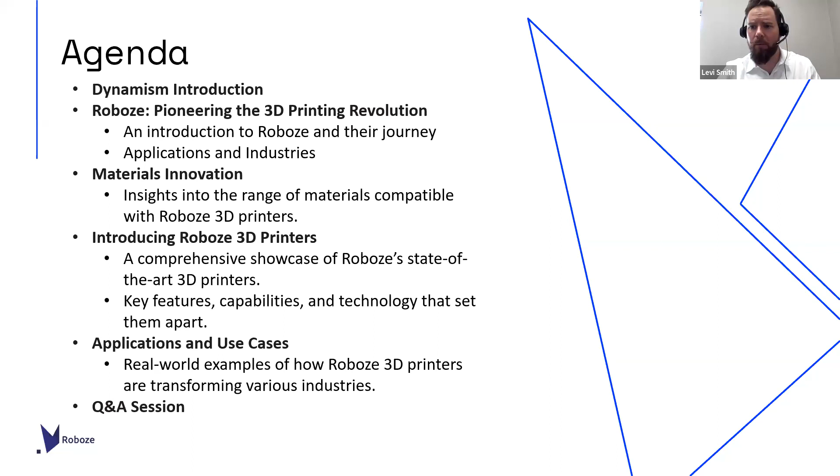So definitely drop in questions as they pop up. I know my questions, they come in and then they go, so feel free to drop them in, we'll get them answered as we go. And at the end, we'll also dive into a Q&A. So that's kind of the agenda today. I'm going to pass it right back over to Hirash to talk a little bit about Dynamism.

Thanks Levi. Dynamism established in '97, headquartered in Chicago. We have a couple of showrooms across the country as well. And I'd like to mention that we are doing a grand opening and expanding our showroom in Chicago starting the beginning of the year. So I would like to welcome everyone to our grand opening. If you have a chance, please stop by. There's going to be a lot of exciting printers and toys that we can play with. Stay tuned for the emails to come around with more information on those dates.

But with Dynamism, we provide the leading edge technologies to our clients. We try to stay ahead of the curve, try to be innovative, bring the most exciting materials and technologies over to our clientele. We have experienced and dedicated professionals, everything from service, application, sales, that can address all the needs of our clients and give unbiased expert advice to what technology and what materials work, always looking into the future for the new exciting stuff.

And this is why we partnered up with Roboze, because we think that it offers extreme value to some of the materials that they're able to print with. We work with different education institutions, national laboratories, Fortune 500 companies, all across the board, even mom and pop. We've installed printers in garages and also major labs. So we're able to adapt to all of our customers' needs and bring in the best experience possible.

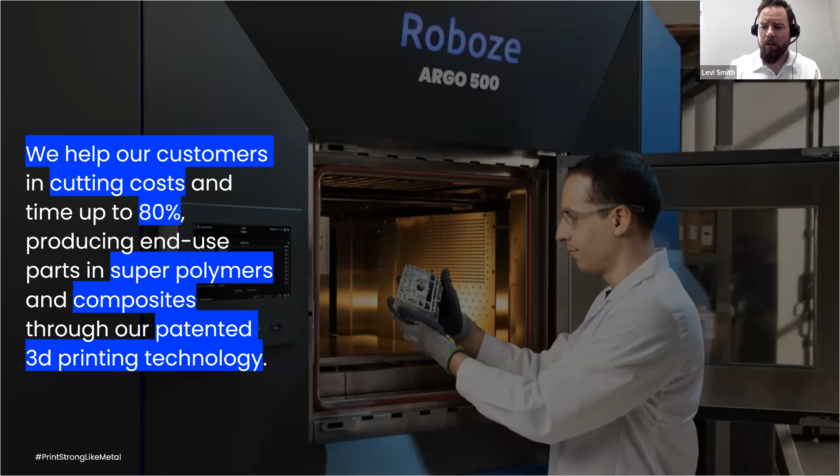If we look at our footprint, our global headquarters is out of Bari, Italy, in Southern Italy. I'm at our North American HQ here in Houston, Texas. We've been around for roughly 8 years now, and we have over 500 printers installed. You can get a rough feel for our footprint in the world there.

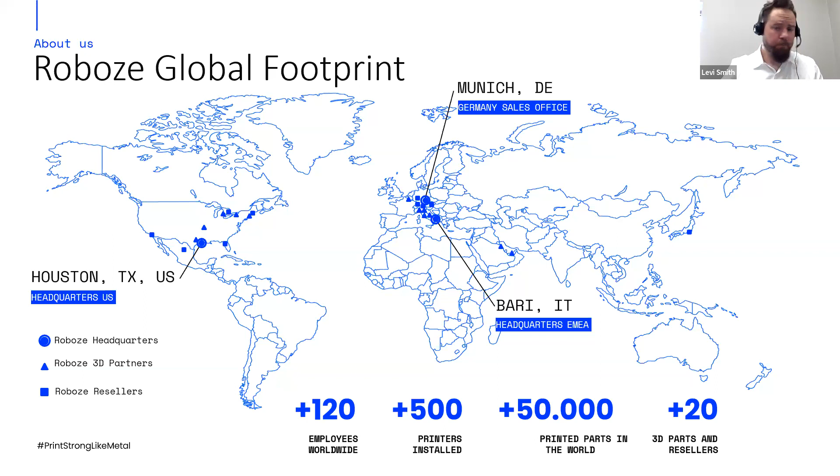Going off that point, I want to touch on where we've really focused our technology, and that is in heavily regulated industries. There are 5 or 6 kinds of solutions to these problems that we come up with. In energy, we see a really rickety supply chain, where suppliers and vendors have struggled to keep up with the parts that these big oil and gas companies need. We've had a terrific amount of success in this regulated industry.

In aerospace, weight equals money, and anytime you can cut the weight and deal with a complex part, you have a great story to tell. There's been a lot of success in this space as well. Mobility, industrial, medical—these are really starting to take off. You can see traditional bread and butter tooling, jigs and fixtures, moving to custom parts on manufacturing lines interacting with various chemicals that require chemically inert materials. There's a great story that Roboze tells here as well.

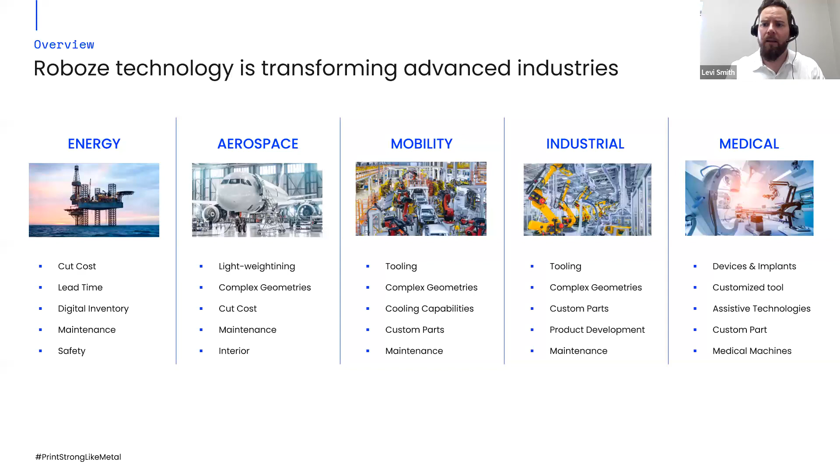Medical as well—you need to have sterilized parts in the OR, and we have a great story to tell. So this is just a rough overview of the industries we're in, where we're having success, and we'll dive into that as we go into the applications and user stories here. As I mentioned earlier, we're a materials-first organization. We have roughly 12 material scientists cooking up the newest set of materials for the 3D printed technology we offer.

I just want to do a quick snapshot, not just over the materials, but the quality of those parts as well. So if we think about the overall tree here, super polymers are our superpowers. Those technical polymers, Carbon PEEK, Carbon PA and the technopolymers, these tend to be our bread and butter materials. But with Roboze, this is what we do above and beyond.

The traditional ABSs that you're used to, the polypropylenes, the PLAs, the TPUs, the range of materials that you see with a traditional material extrusion printer, you're going to get with us, and you're going to get it with a very precision set of technology. We'll dive into that.

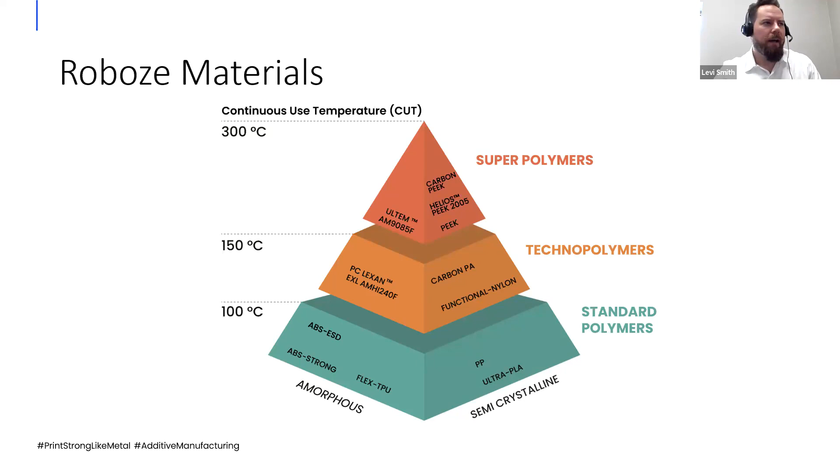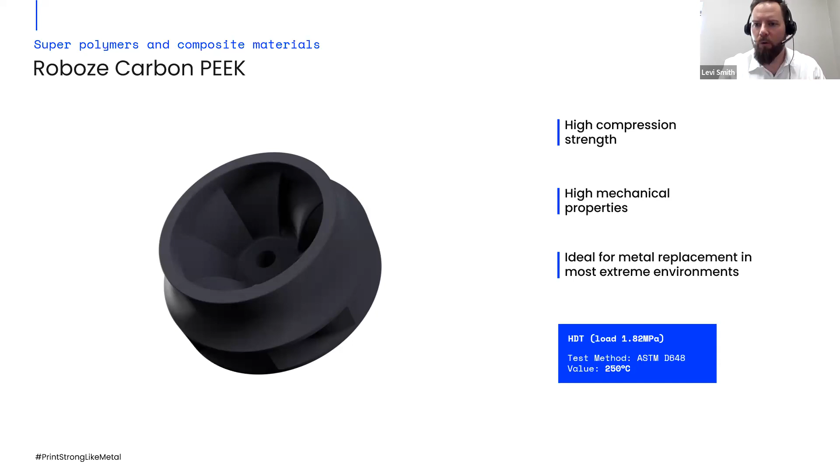The first material I wanted to touch on is our bread and butter Carbon PEEK - high compression strength, high mechanical properties. You can see the complexity of this part, this is an impeller in the oil and gas space. Our customer at the end of the day was struggling to source this part. It was originally a metal part that we were able to replace, but our materials are built for the most extreme environments. Not only the complexity of this part, but just think about the overall quality, the surface finish, what you're seeing off a material extrusion printer like Roboze here.

The next part I want to touch on is this part out of Carbon PA Pro. Again, surface quality - a lot of people don't necessarily expect this with a traditional extrusion-based printer, but you can see the print quality on the screen there. Carbon PA Pro is great with regards to tensile strength, tensile modulus, great thermal resistance, another bread and butter material that we've developed in-house.

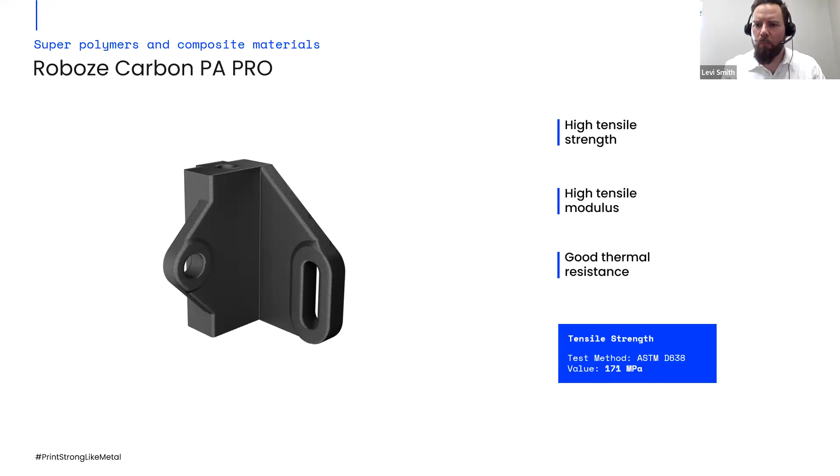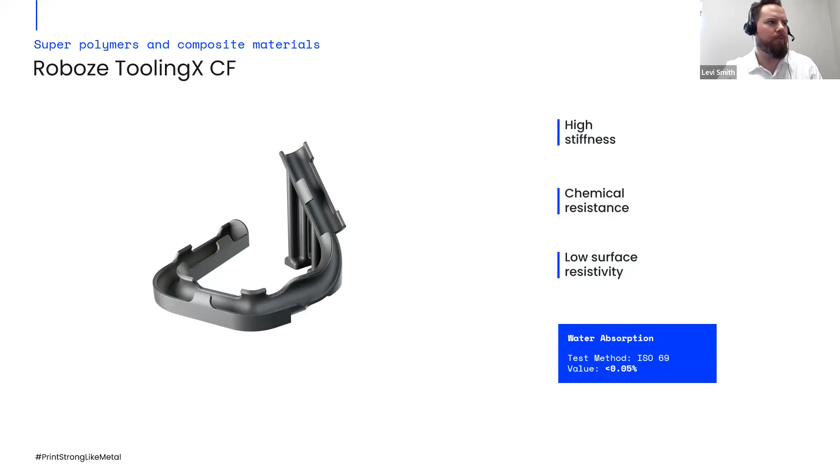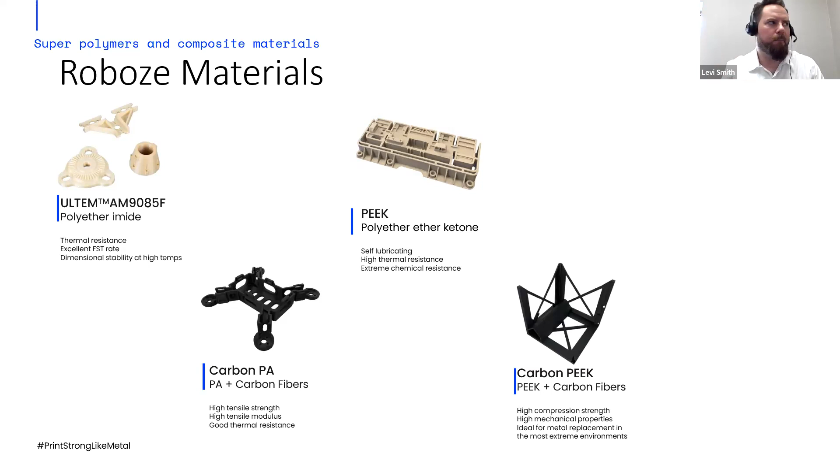I want to give you guys a quick snapshot of the materials that we have available, and this is really how Roboze is positioned. We have this material that's been hard to manufacture - we're able to 3D print it, and it's really based on some proprietary technology that we built in-house.

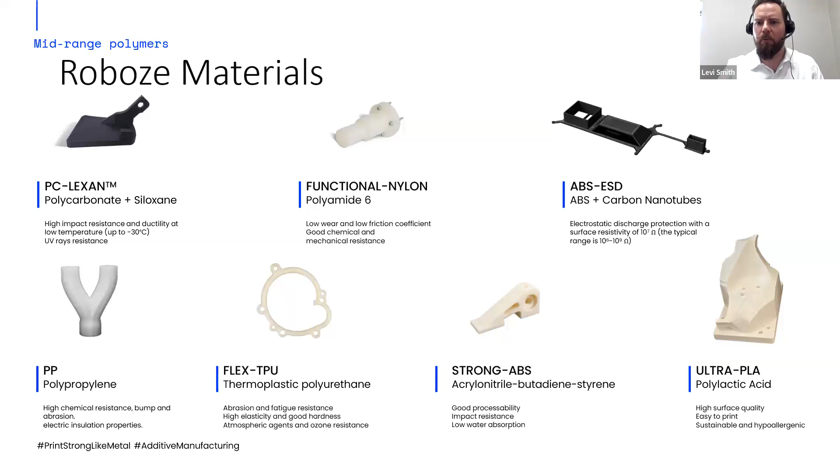So what I want to showcase is the range of printers that we have, what makes them special. We also have a new product that we just announced at Formnext last week - we'll touch on that as well before we get into case studies.

Two printers I want to highlight here, obviously the Plus Pro - great with regards to small batch production and prototyping with high performance polymers. You get a build volume of roughly 300 by 250 by 220. There's a lot of features we'll touch on in the next couple of slides, but this one is great for small batch production and prototyping with our super polymers.

The Argo 500, again, great with regards to large batches, large serialized production of parts.

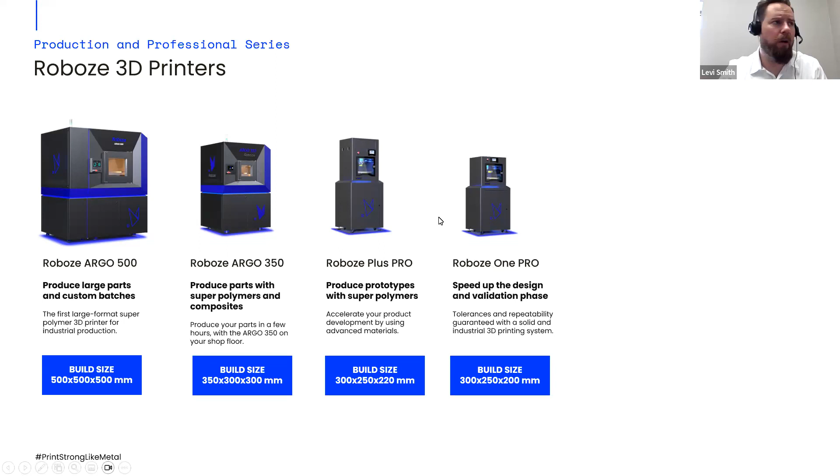Really, the special ingredient, the patented technology we always like to touch on is the patented beltless system at Roboze. Traditionally with material extrusion, it's usually an extrusion system on belt technology, which tends to break down over time, and there's a lot of maintenance you have to think about. With regards to us, part of our system is this rack and pinion beltless system. It's really the bread and butter of both our professional series and our production series, delivering tremendous repeatability, tremendous dimensional tolerances, and positioning tolerances up to 10 microns.

This creates an environment with a lot less maintenance than traditional material extrusion. Usually the maintenance of our machine is really just greasing that rack and pinion once a month to make sure it's at its capability to produce what you need to produce.

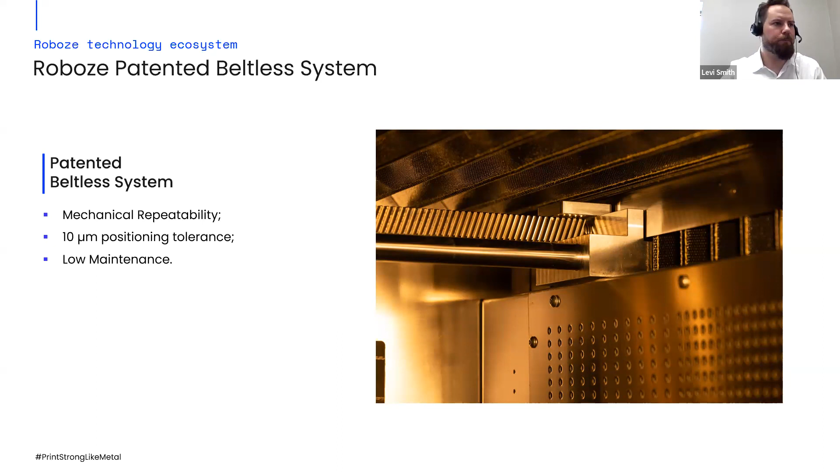Our HVP extruder is another advantage I want to touch on real quick. It's patent pending and optimizes the flow of our high viscosity polymers. This is a crucial component of working with some of the toughest materials to print with. It reduces the shrinkage rate. We have the ability to do dual extrusion, and it's very easy in terms of maintenance and replacing that extruder, making it very easy to change over.

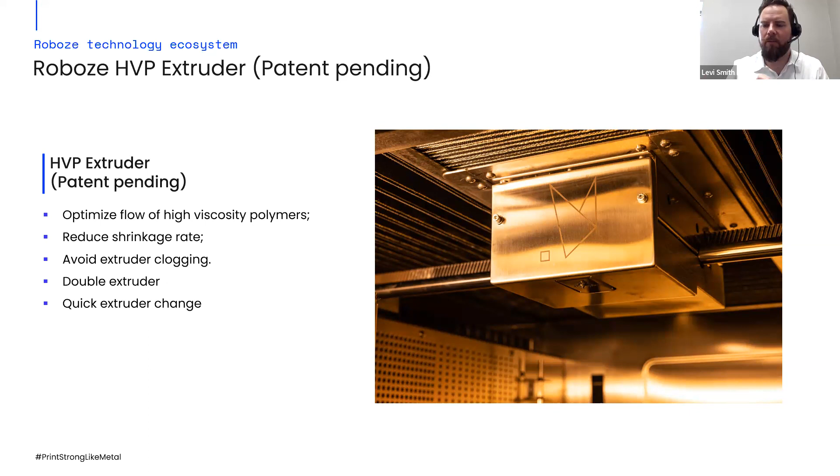So we don't run into issues associated with material that has a little bit more water absorption than it needs. The high temperature filament dryer raises the temperature so all the moisture sits at the top of that filament, and then we shoot high pressurized air over that filament, so it's at the most optimized environment possible before we actually extrude in our printers.

We also have an insulated heated chamber, and it works more or less like a convection oven where it's actually pushing air down over the part, creating a uniform effect over that part. So the heated chamber is a crucial component of what we do, and then obviously the vacuum system with regards to the build plate. I just want to quickly highlight some of the key advantages of the technology. We can definitely dive into this further if questions arise.

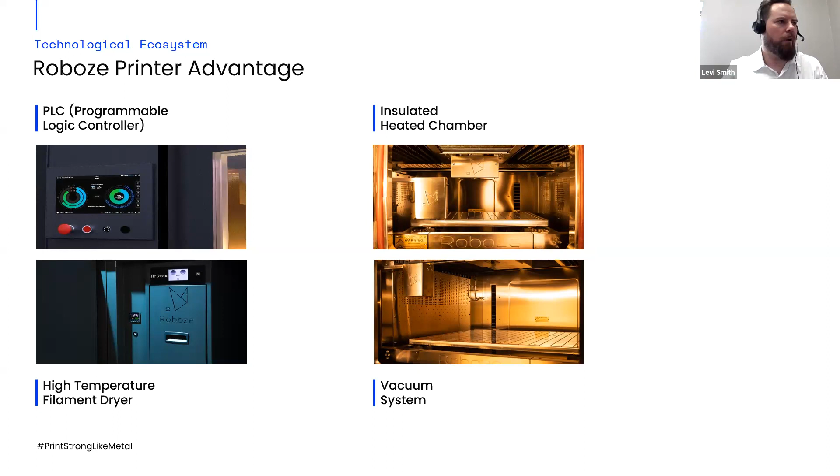Really what we're looking at is traditional large format FFF. How do we speed things up and how do we decrease the price per part that we see on the market? An extrusion pellet-based extrusion printer was really the way we went about it. So in terms of outcomes, depending on the part you're building, you're going to have a 10-fold speed increase, and based on pellet extrusion technology, we're able to really reduce the cost per part.

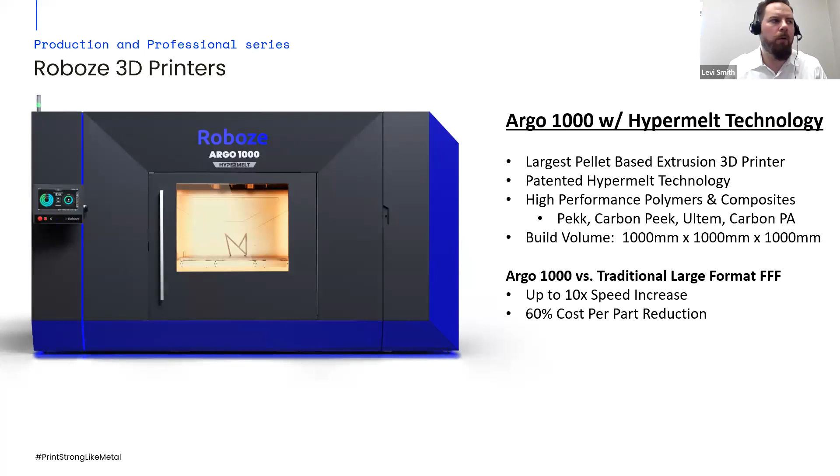Again, really excited about this, something we just announced at Formnext. If anybody has any questions on this or would like to see it, just let us know, let Harach know. We're really excited to bring this to the market in 2024.

So we're going to step into customer testimonials. What I want to do is touch on some of the application user stories that we have. I really want to focus on the verticals where, as I touched on earlier, energy, aerospace, industrial—that's really what we'll focus on.

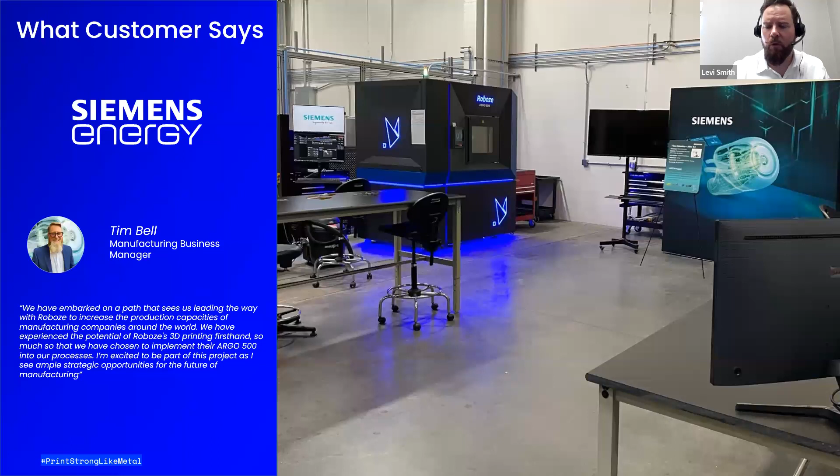The first one up is Siemens Energy. This is more green energy, working in the turbine space, and we've had a very strong partnership with them for quite some time. Think about where these wind turbine farms are being built and placed, the rigorous environment in which they need to perform under specific tolerances and stresses, dealing with a range of different components. With Siemens, it's not only that you need to print high performance in-use parts, but the complexity of those parts is really why Siemens chose Roboze. It's been a really exciting partnership, and it's continuing to grow.

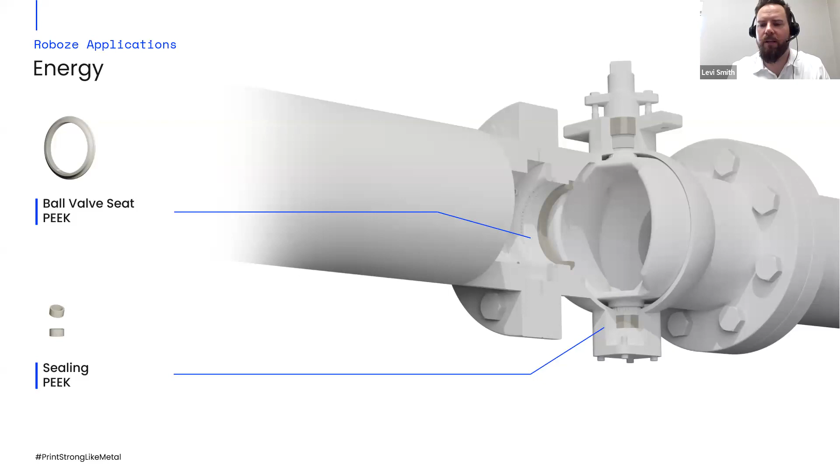If you think about traditional oil and gas, what we see in this space is a lot of different components, whether on a platform or down the line with pipeline applications. That's what you see on the screen here—we have a ball valve seat and seals in our PEEK material. Again, it's a rigorous environment with a range of different chemical interactions associated with this pipeline. This big customer of ours was struggling to find and source a vendor to support this application.

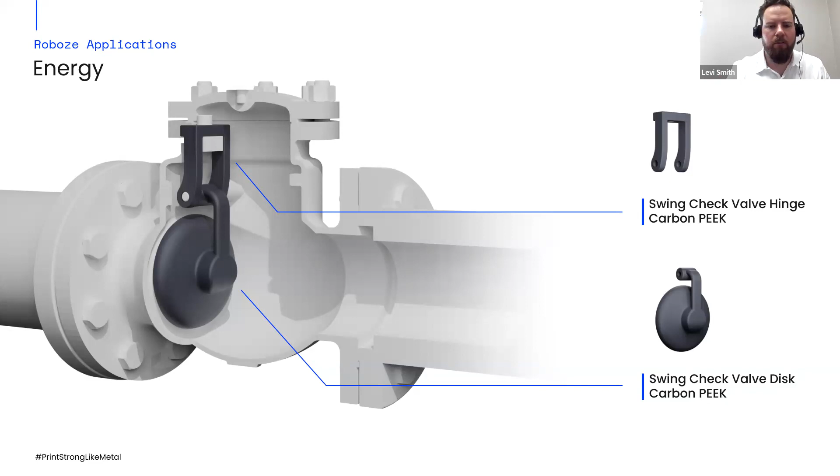Another bread and butter application we see is in our Carbon PEEK material—we have a swing check valve hinge and a swing check valve disc. Very similar, there's probably a dozen applications within this pipeline alone that we've had tremendous success with. Again, it's a complex part, but high tolerances needed to be met with regards to what this material could do in that environment. This has been a really successful application for us in the energy sector.

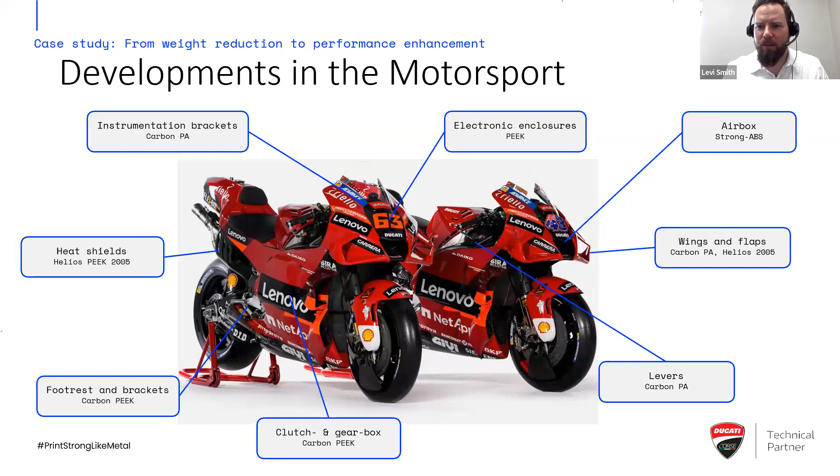I don't know how many people on this call follow motorsports, but I want to touch on our partnership with Ducati. If you tune into these events and look into the Ducati garage, you'll see one of our Argo printers in there—they're actually printing at the events based on the high amount of iteration they need to do. It's been one of our most successful customers. There's a range of parts on this bike on a regular basis, roughly about 8, from traditional instrumentation brackets, heat shields, electronic enclosures in PEEK, to some of our mid-range polymers like our strong ABS for the airbox. We have a lot of Carbon PA Pro, Carbon PEEK, and PEEK, all 3D printed on the Roboze professional and production series printers. So lots of in-use parts being used with Roboze printers.

Leonardo—again, a really strong partnership and a very successful customer. They're constantly thinking of new ways to take their complex geometry, make it lighter, just as strong, and faster than they've traditionally done with their supply chain. They're very excited about what they see with Roboze and our PEEK material with the Production and Pro Series printers. They've been experimenting quite a bit, and there's a series of different parts they're validating for their helicopters. Very excited about this.

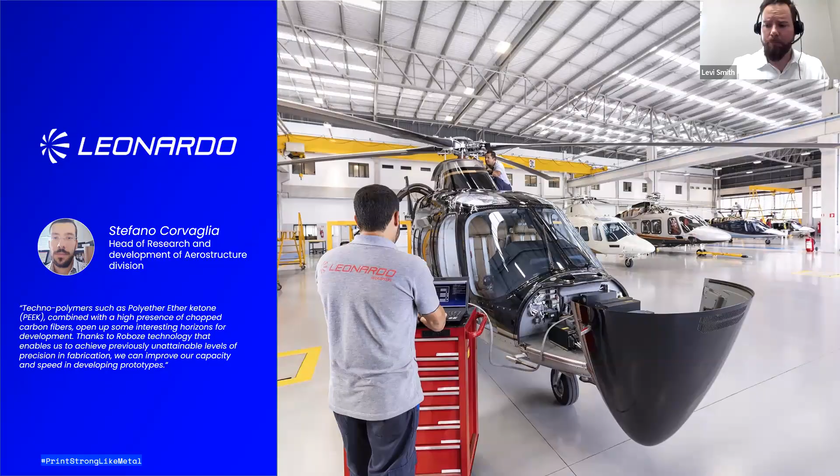Just a couple more examples of applications we see in this space, from Carbon PEEK to traditional tooling we see in aerospace with Carbon PA and Carbon PEEK—this is a hand layup tool. We also have a complex cup holder in our ULTEM 9085. Whether it's a low production batch or building your own digital inventory, aerospace is really starting to take off because we focus on these regulated industries, making sure we validate specific parts before really growing in that space. That's what we've done whether it be oil and gas, energy, aerospace, industrial, automotive, or medical. We're a very technical group that validates in these regulated industries before we expand.

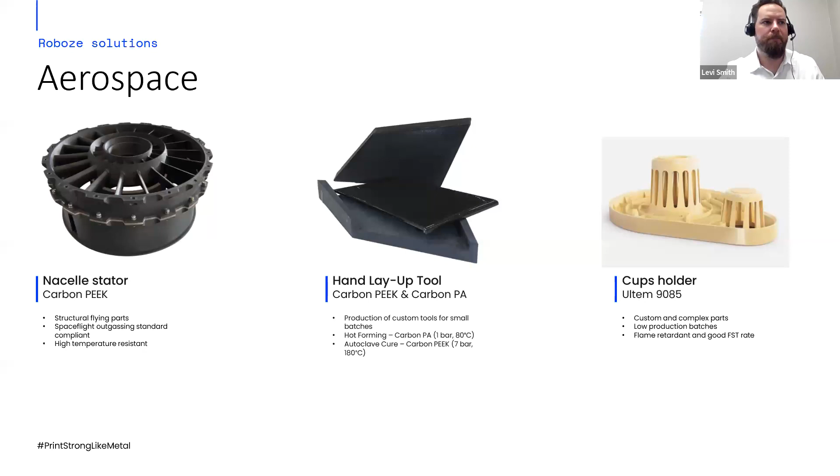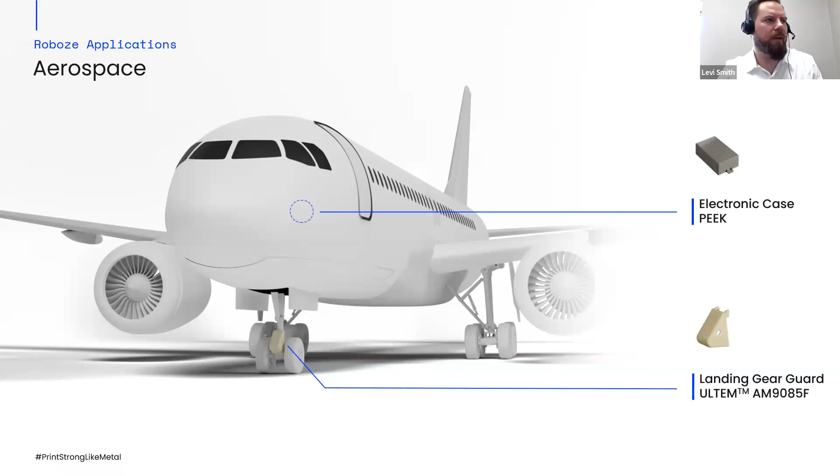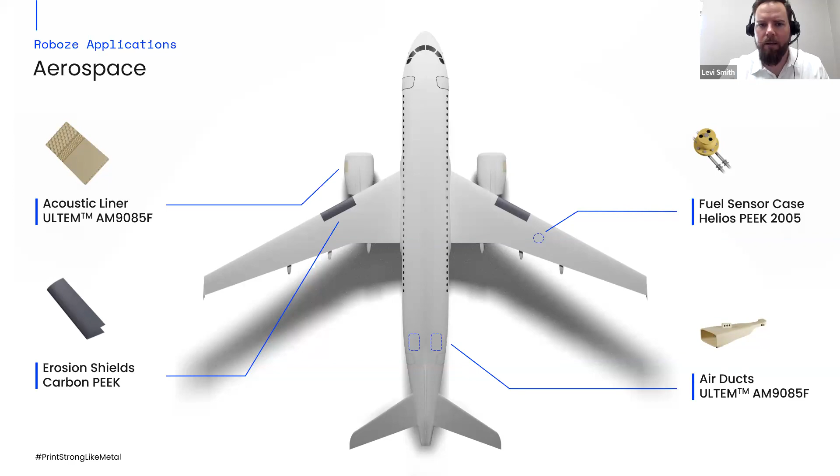Sasol is a chemical production company out of South Africa. For them, chemically inert materials was really the focus, not necessarily metal replacement, although that's what it actually became. They needed parts that were originally sourced in metal, and they struggled with their interactions with some of the industrial chemicals they were producing. So that's when they moved to Roboze to actually build what they needed to build.

And there's a range of different applications we see on a regular basis. Go out onto the shop floor, you're going to see them everywhere in terms of where we might be a good fit. I've got a couple more examples here I wanted to touch on in manufacturing. You'll see this throughout manufacturing, throughout industrial.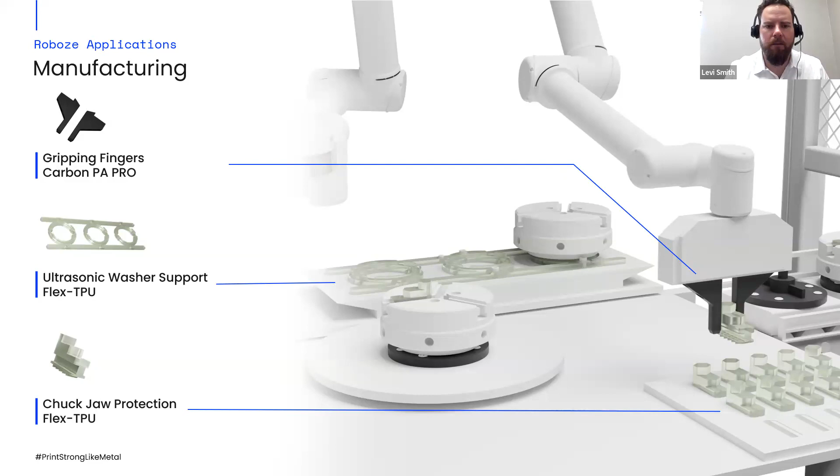So yeah, that is really what I wanted to talk about today, just to give this introduction to who Roboze is, where we're going. We're really excited about the partnership with Dynamism, where we can take this together. At this point, I'd love to break it off and answer any questions that have arisen, if there's any.

Levi, that was a great presentation, a lot of useful information. As everyone can see, these super materials are addressing a lot of different applications, and this is just scratching the surface of what Roboze is capable of doing. So in the future, if you guys want to reach out and discuss, we'll be happy to bring in our applications teams and discuss your applications, see how the materials fit and perform, and we can provide you with samples. We're actually getting our Roboze demo installed very shortly, so we'll be able to provide some great samples for you.

And like Levi mentioned, looking at these parts, you'll definitely have to do a double take because they do not look like FDM parts. The surface finish, the accuracy is definitely on a different level with Roboze. So we'd be happy to explore your application and provide you with samples. Just feel free to reach out to myself, our team, or Levi, and we'll help you with all that's needed.

Perfect, I appreciate that, Harach. And yeah, like I said, we'll keep it open just one more minute or so to see if any questions arise. Really excited about bringing this technology to the market with Dynamism. And as I mentioned, if anything's of interest, whether it be our technology or just an application problem, this is the beauty of Dynamism. They've been doing 3D printing for more than a decade, and they've been bringing the newest, most innovative products to the market. They see where the gap is and they go find and source that vendor. So this partnership's really exciting. We do think there's a tremendous amount of potential here in the North American market. So obviously I'm here supporting Harach, but any questions, we can definitely get them answered.